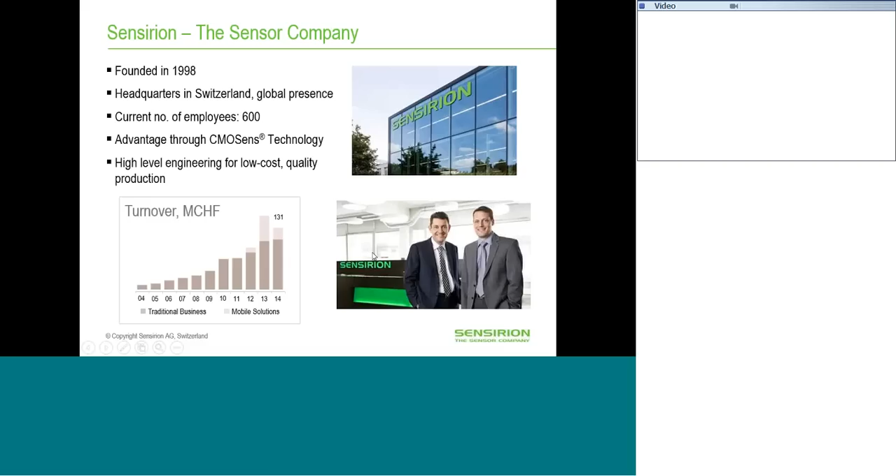And what you can see here is the latest turnover. So we are a medium-sized company with about 130, 140 million Swiss francs turnover, and on the right side you see the founders of the company, which are Moritz Lechner and Felix Mayer, and they're still co-CEOs, and the company is still privately owned. So we have a very long-term perspective on what we want to do research-wise and product-wise, and that's actually a quite good working environment too.

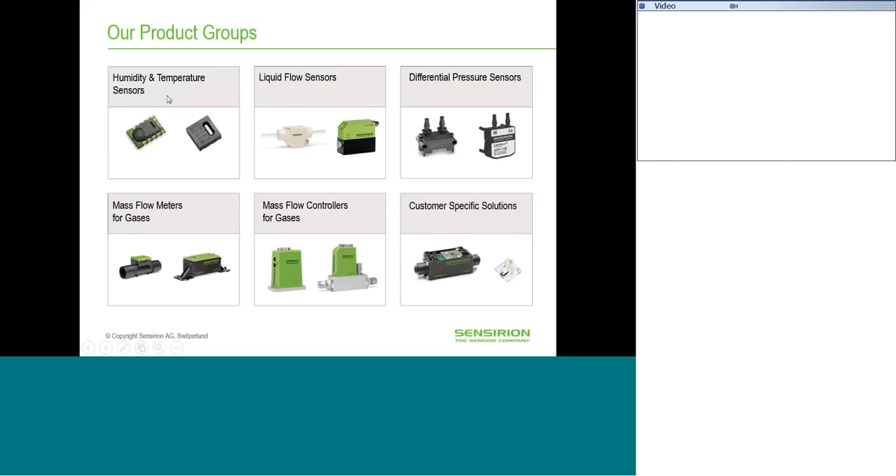Our product groups are not only humidity and temperature sensors, which the talk will be about, but also flow sensors, differential pressure sensors, flow sensors for the gas and the liquid state, and customer-specific solutions and so on. So there's quite a matrix of different products which we are developing and working on. So I will focus now on the humidity sensors, which intrinsically also have a temperature sensor too.

And the next generation, the SHT3X, which we have launched already this year, is a very versatile sensor, which I address in the following slides, what the versatility of the sensor actually means. But now let's just quickly go into the topic of discussing the physics of humidity.

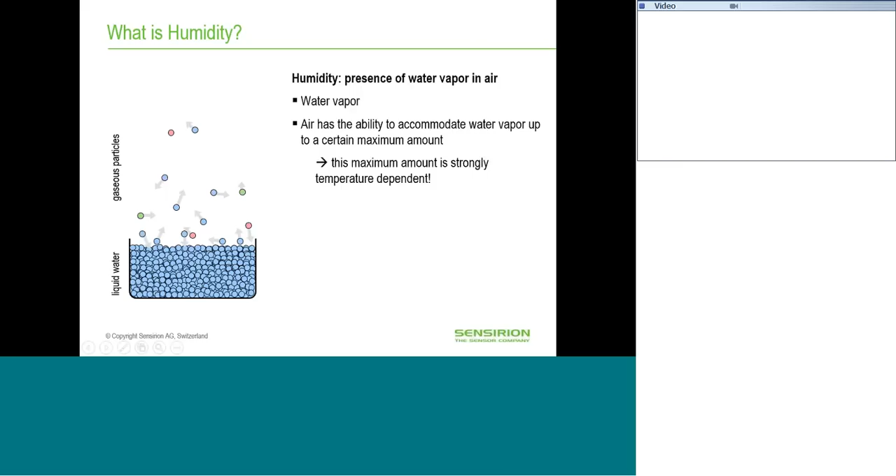So if you have a closed box now, a closed environment, we will have an equilibrium state where the evaporation rate from the liquid phase into the gas phase will be equal to the condensation rate from the gas phase to the liquid state. And in this state, the air is saturated with water vapor, and this is the maximum amount of water vapor the air can accommodate. So what's happening if we increase the temperature?

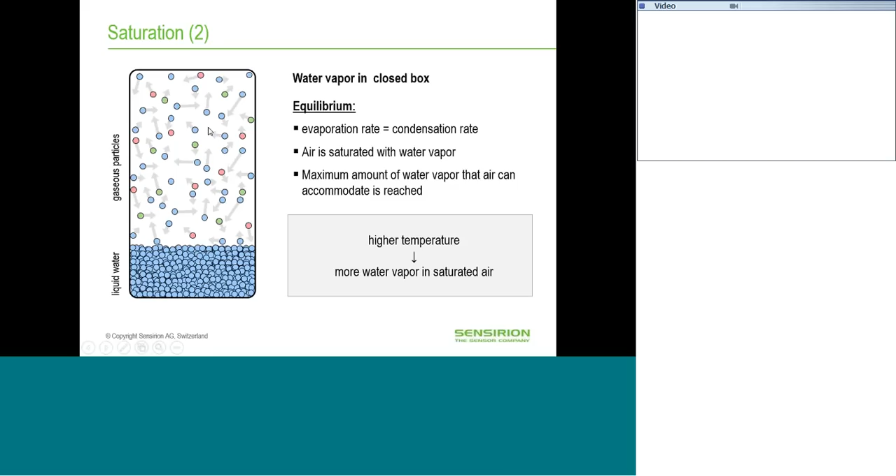If we increase the temperature, more water is released from the liquid state into the gas state, and the air also can accommodate more gaseous water. So there's more water vapor saturated in the air. This is following an exponential law. So the saturation vapor pressure of gaseous water is an exponential law with respect to temperature.

And like I already mentioned, we have an equilibrium state once the evaporation rate and the condensation rate are equal. And again, we see that this exponential law will be a phase limit line between the gaseous state and the liquid state.

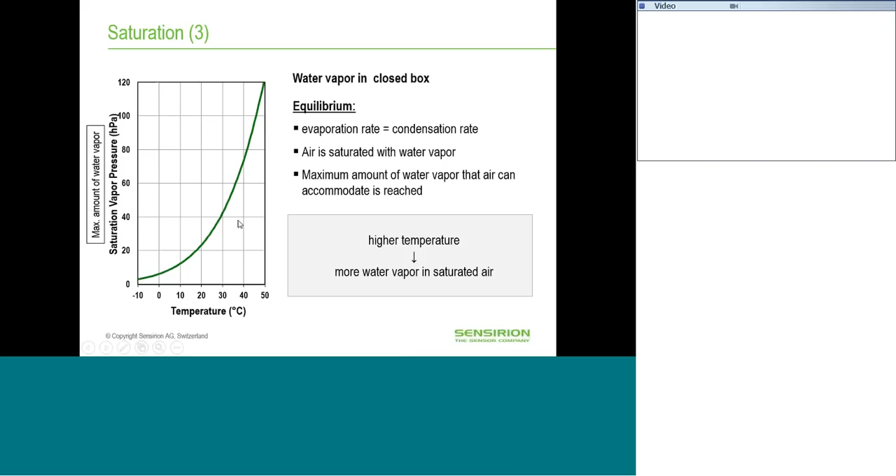So for example, if you have a temperature of 30 degrees Celsius and we have a relative humidity of 50%, this is actually the amount of water vapor in the air divided by the maximum possible water vapor in the air. So if you double the amount of water vapor in the air, then you will reach this line, and then you will cross from the gaseous state to the liquid state.

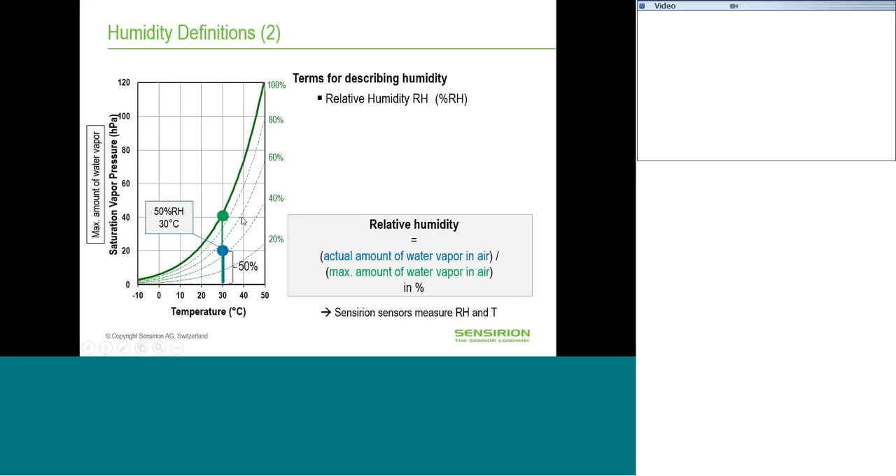And so you will have different exponential lines for certain values of relative humidity, and so you already can see that it's very important, if you talk about relative humidity, at which temperature you are sitting. So for example, if you're sitting at 40 degrees Celsius, your relative humidity of 50% means that you can have a lot more water vapor in the air.

There's a different description of relative humidity. That's the dew point, which is basically a temperature value which is derived from your certain relative humidity value, if you're going horizontally towards the phase transition line, which is the green line that I already introduced. And once you're hitting that line, that means you would be crossing the transition from the gas state to the liquid state. And this is the dew point.

So if you have a certain humidity at a temperature of 30 degrees Celsius, for example, the dew point would in this case be 18 degrees Celsius. And if you shock cool the room or the environment down to 18 degrees Celsius, your water vapor will start to condense.

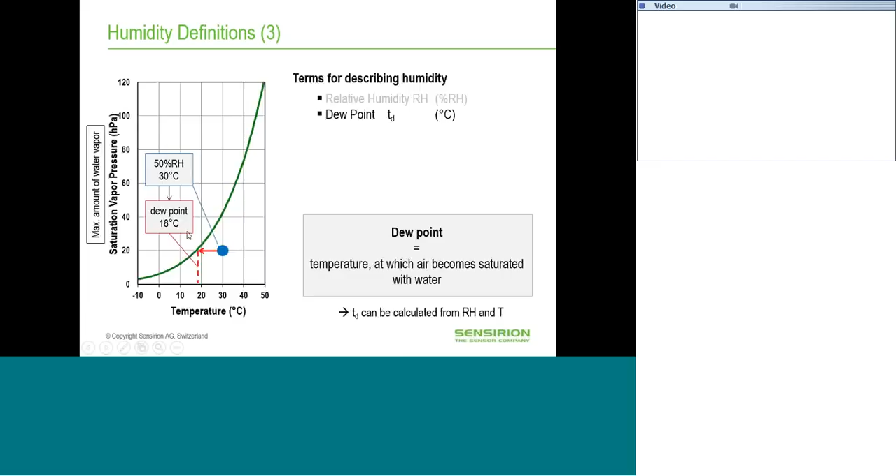So the main topic I wanted to share with you here is that humidity is relevant to our everyday life. We are always exposed to humid air. You experience that in heated rooms in winter when there's lots of heating power, and the dry, cool air will be heated up, and you will have breathing issues if the air is too dry.

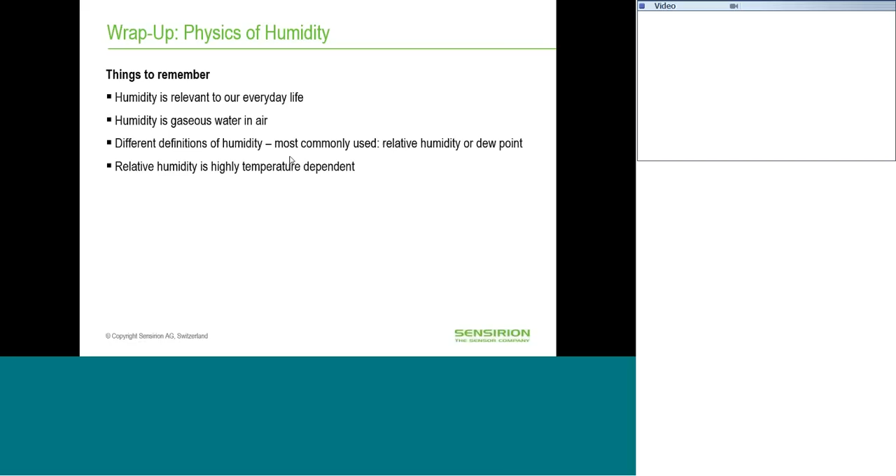So it's a very important factor for our well-being, and humidity is basically the gas phase of water in air. And we have different definitions, which are the relative humidity or the dew point, to describe a certain humidity state. And once again, it's very important to have the temperature if you're talking about relative humidity, and this is why every RH sensor, relative humidity sensor, also intrinsically has a temperature sensor. So this is basically a short introduction into the relative humidity topic.

Miriam, are there any questions so far? So far we don't have any questions, so we can continue. Okay, thank you very much. Thank you.

Let's talk about what we are doing to detect humidity at Sensirion. We have quite a large variety of products, and they are all based on the patented technology which we call CMOSens. Here at the bottom you see our latest DFN package-sized SHT3x humidity sensor, and if you look closer, you see a hole in the middle, directly opening the package to the die, and the silicon die is covered with some electronic structures, which you see here in the form of a grid structure, and on top of it there's a polymer.

It's a water accepting polymer, so if there's a high humidity, or a large number of H2O molecules in the air, then these water molecules will penetrate into the polymer and change its capacitance. So what we are actually doing is measuring the capacitance of this capacitor, which consists of this grid structure and the polymer, and we do this with a frequency measurement, and you can measure it very, very accurately.

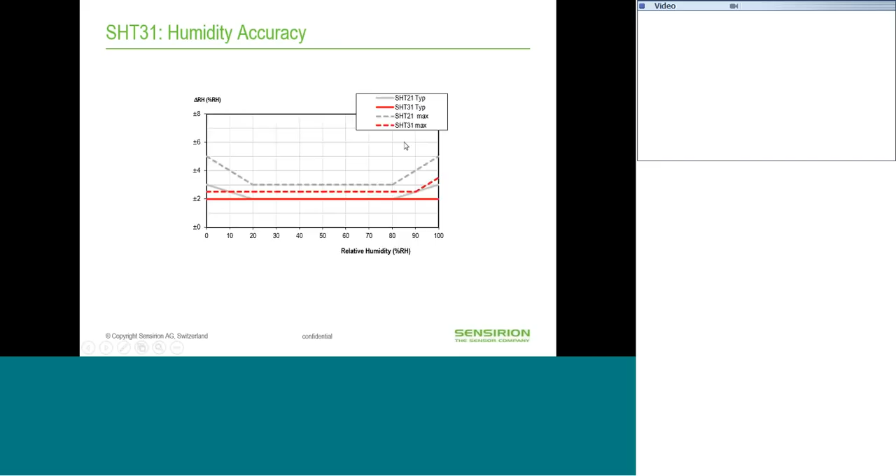this accuracy level, and also the maximum values are almost flat, and we could significantly reduce the maximum accuracy of the delta RH. Maximum accuracy means a deviation of four sigma of a set of sensors. But there's also a little more detail, because we have a two-dimensional phase space, if you wish. We have temperature and we have relative humidity.

And if you look at the whole two-dimensional accuracy map, you will see that there are quite some edges and side points where the sensor is not as homogeneous as you wish it to be. And here, this is the previous sensor. I should have explicitly labeled it. It's the previous sensor, the SHT21, and the SHT31 now really changed this whole accuracy map into ±2%.

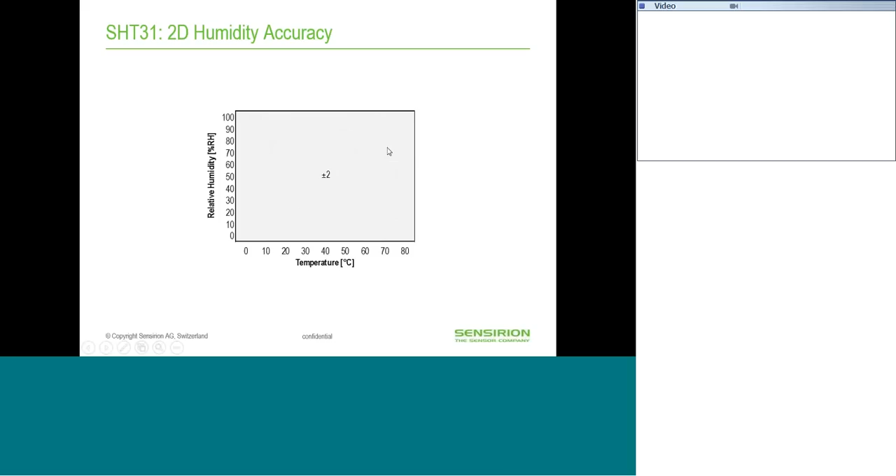So you, as an application engineer, don't really need to worry about what your temperature and relative humidity are and look up how accurate your measurement is. Actually, everywhere it's ±2%.

Okay, so let me briefly discuss the analog outputs. We have a ratiometric voltage output of 10 to 90% of the supply voltage. It's a fully calibrated signal. What we do is we convert the analog signal into a digital one, linearize it, and do the analog conversion back. And this is our output.

So this is the ratiometric output, ranging from 0 to 100% humidity. And you can read out the temperature and the RH value on two different pins here. Pin 1 is for the RH, and pin 4 is for the temperature.

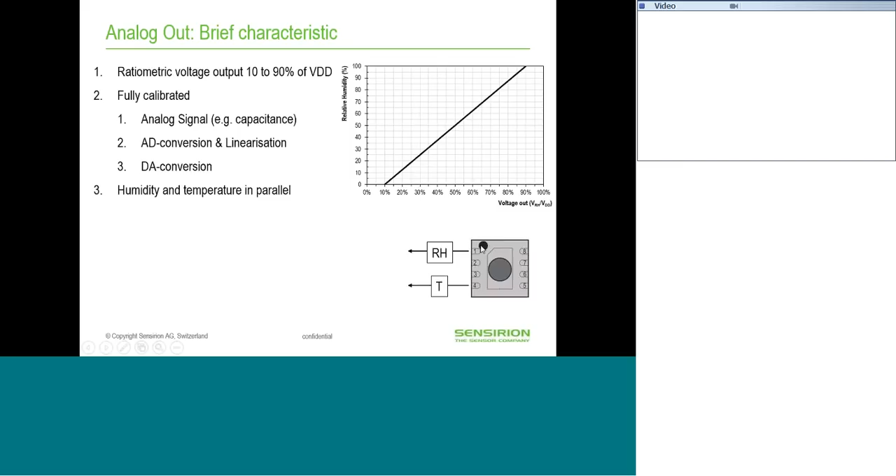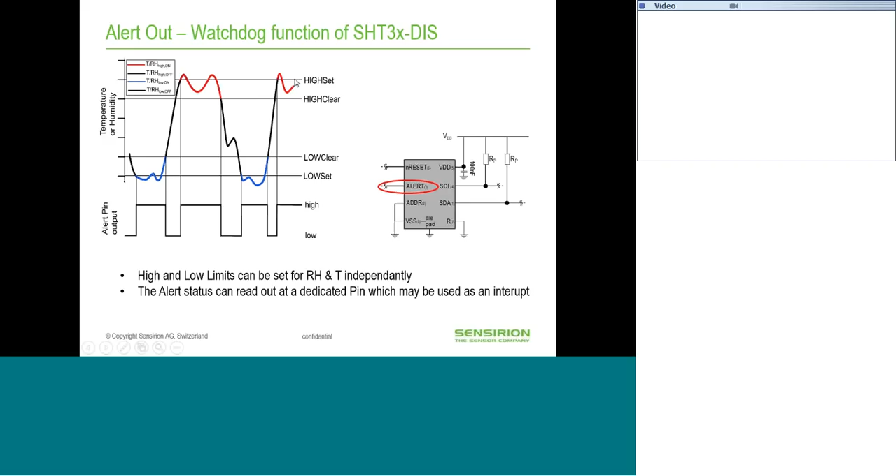A second feature which we have now implemented on the sensor is an alert value that you can set independently for the RH and the temperature values. So as soon as, for example, the temperature or the humidity rises above a high set value, the sensor will communicate the new RH value, and unless this happens, the sensor will just not communicate, and in this case save on power. And you can set different high set and clear values, and also low clear and low set values.

And what I would also like to quickly introduce to you now: the sensor is basically this small 2.5 millimeter square package, and it's very hard to get a grip on it once you just have the sensor lying around.

And Miriam will probably mention this later also: we will provide a small Bluetooth gadget, which has the current sensor implemented, and it comes with a battery you see here, a Bluetooth module and a display, and it's quite a handy small temperature and RH weather station, if you wish. A weather station would mean you have a pressure sensor, but this is not the case. So I will just call it an advanced thermometer.

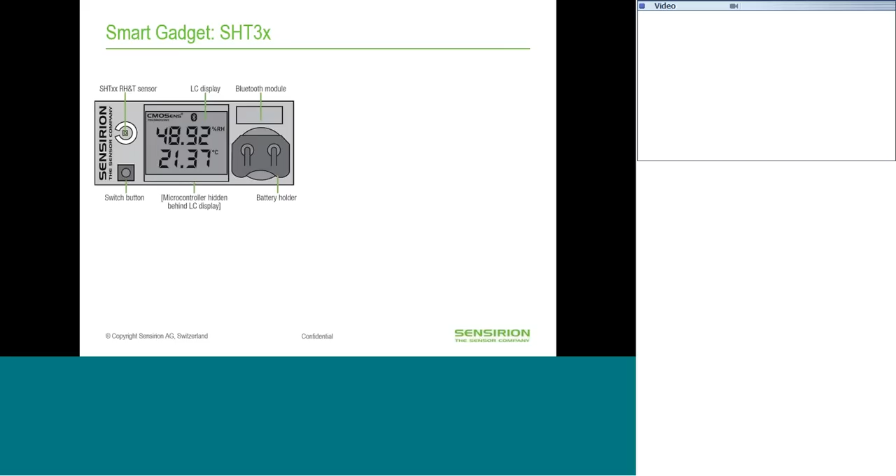And the nice feature about it is that you can download an app in the App Store or in the Play Store for Android smartphones, and communicate with the gadget via Bluetooth, and this will allow you to log your temperature and humidity values over time, and this will also give you a first grip on the sensor itself.

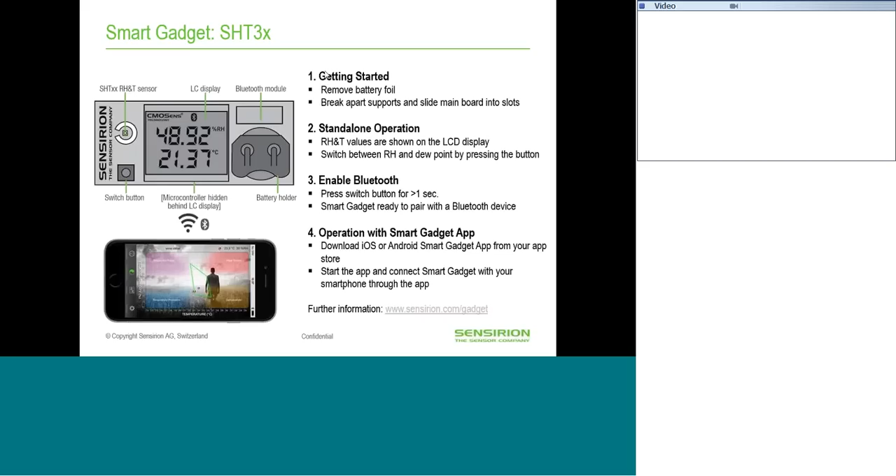So you have smartphone connectivity, and there's an app which you can download for free in your relevant store, and you can just get started by removing the protective cover for the battery, and then it's pretty much self-explanatory, but we will also have a data sheet coming with the gadget. So feel free to use it, and please enjoy the app.

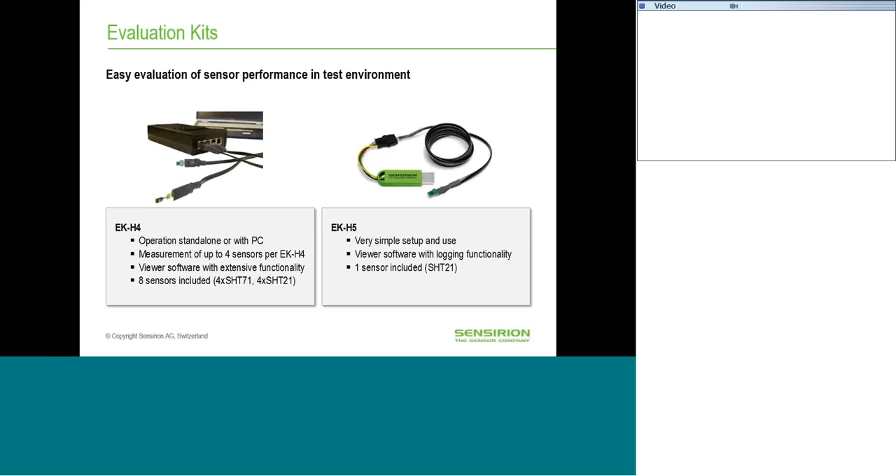So this is a very simple plug-and-play solution for your computer. You can use it with a USB adapter, and at the end of the cable you have different options to mount different sensors. So it comes with several sensors, and I will quickly show you once you've downloaded the software. There's also an explanation of where you can find the software. It's also on our web page. It's quite a straightforward installation. Let me quickly show you.

I've already installed the software, and if I start it here, it will prompt and ask which sensor I'm using. In this case, I put in the sensor SHT2x, and then I will just click OK. And you can start, run and play with different resolutions and stuff like that. And here you will see the temperature and the humidity.

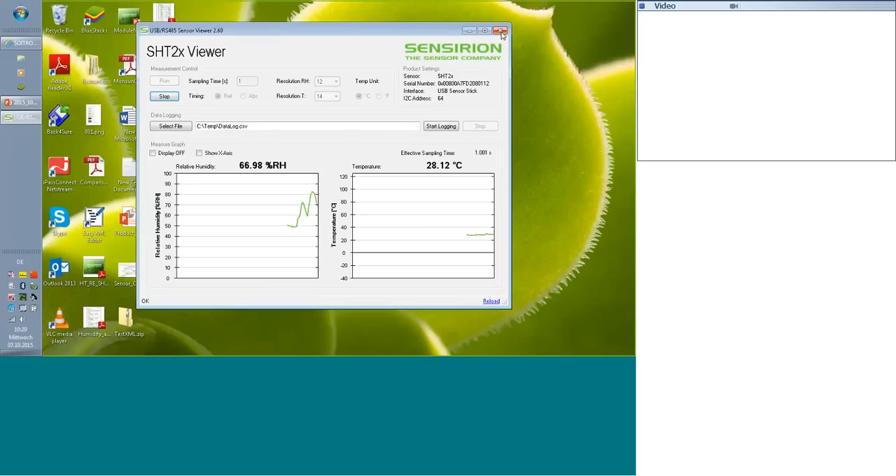And what I'm doing now is basically breathing onto the sensor, and you will immediately see that the humidity will rise and the temperature will rise, and it's quite a quick way to get a first grip on our sensors and play with them in relevant and different scenarios. So coming back to the presentation, this was the live demo. And like I said, it's a very nice tool.

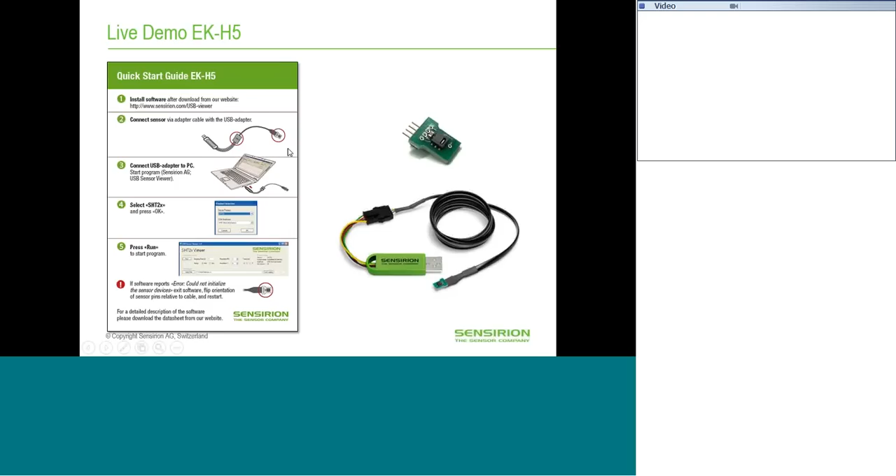If you have sort of an engineering prototype standing around, you can easily plug this into your fridge or whatever you're developing and get a first-hand experience on it. So far for the technical part on these SHT3x sensors, please feel free to ask any question you want.

So far we don't have any questions, so we can continue.

Excellent. So now I will briefly talk about design guidance and handling instructions. As you might expect, the humidity sensor is always just as good as it's sensing its immediate surroundings. So it's very important to provide for a proper design of the sensor, and it should be best coupled to the environment and not really to the electronics of your device.

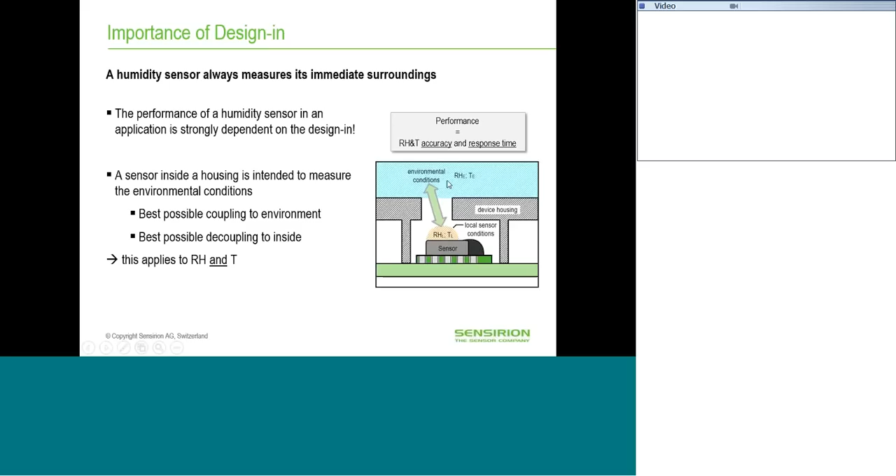So if you're building, for example, a smartphone, you will have several electronic devices in there, and it will heat up, and you don't really want to measure basically the temperature of your processor. So it's always important to have a good coupling to the outside or to the actual environment you want to measure, and to have a very strong decoupling to the inside, which is basically just the readout electronics or the processing power.

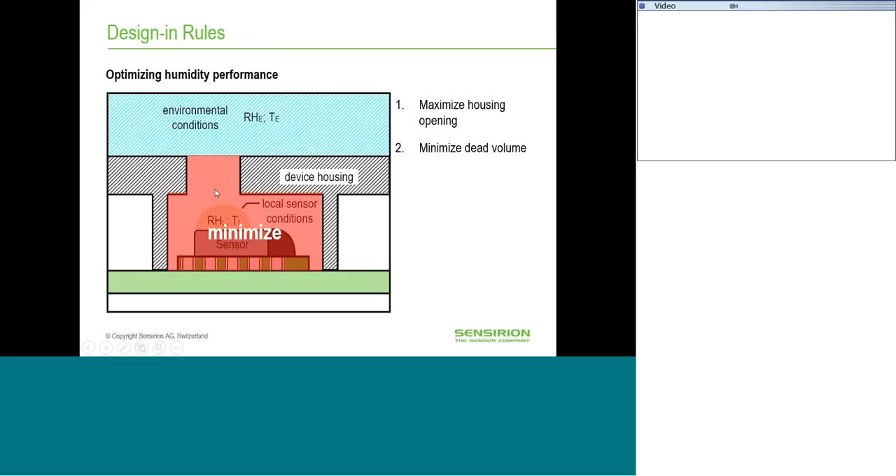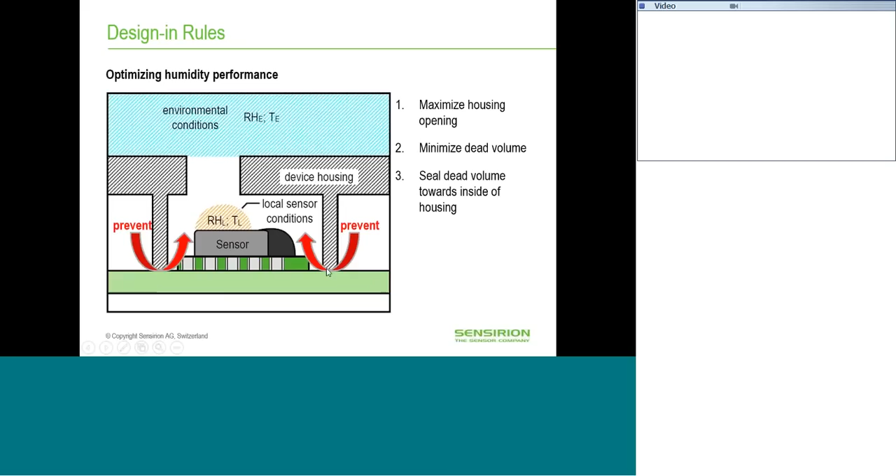In this case, you really want to maximize the opening of the housing, and you also want to keep this volume very minimal, so you're not having a huge response time before this outer environment will be completely in equilibrium with the inner, or vice versa. And you also want to prevent a lot of crosstalk from the housing to the actual sensing environment. So this basically needs to be sealed very well against humidity, for example.

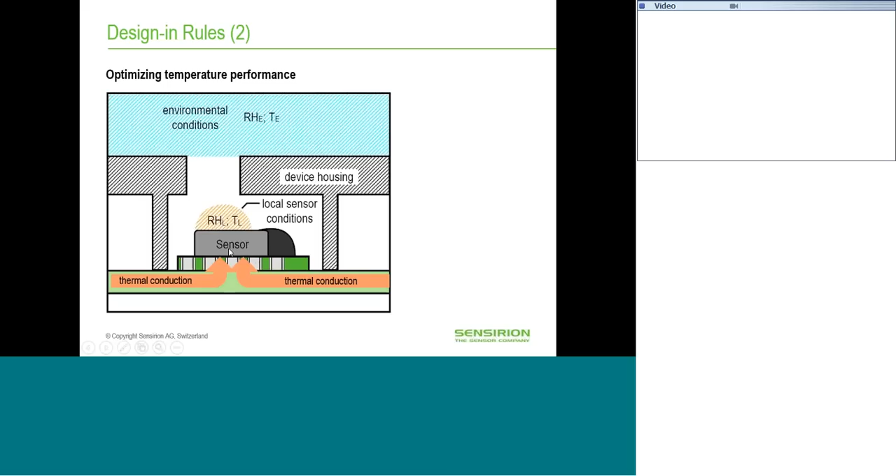And the temperature performance also benefits if there is not a huge thermal conduction. So if you mount this on a metallic substrate, it's very critical to reduce the thermal conductivity towards the sensor. We have SMD assembly processing guidelines, which are hosted on our website. The sensor itself is reflow solderable and can go through several reflow soldering processes.

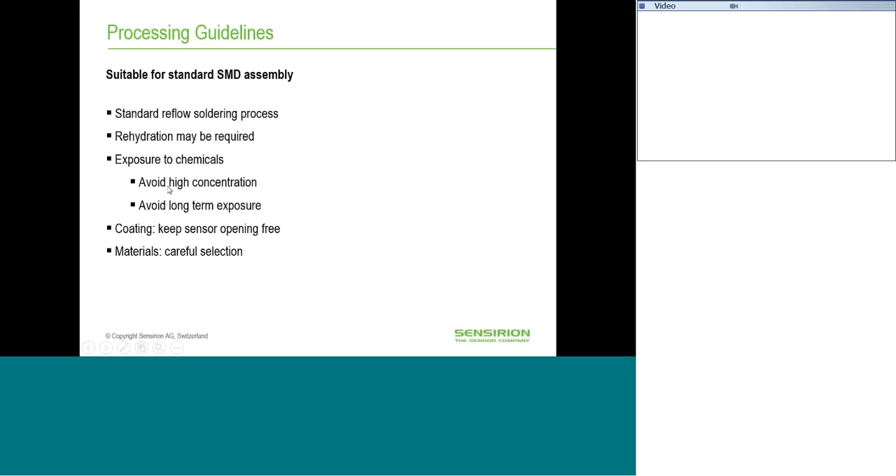There might be the task to rehydrate the sensor, because if you heat it up for too long, the humidity gel or the polymer will dehydrate, and this needs rehydration. We also want to avoid high exposure to chemicals, and there are different chemicals which are contaminating the sensor. We have a list on our website where you need to take care that there's no high concentration chemicals going to the sensor directly. So I just put this as a link or a reminder. We have handling instructions on our web page, and there's more details to find there.

So finally, what's really important to do or to not do with the sensor? It's really important to take some effort to make a proper design-in of the sensor, because otherwise the sensor can have a very fast response time and can provide very quick accurate measurement values, but if it's not really talking to the environment, then this is not really useful to you as a customer.

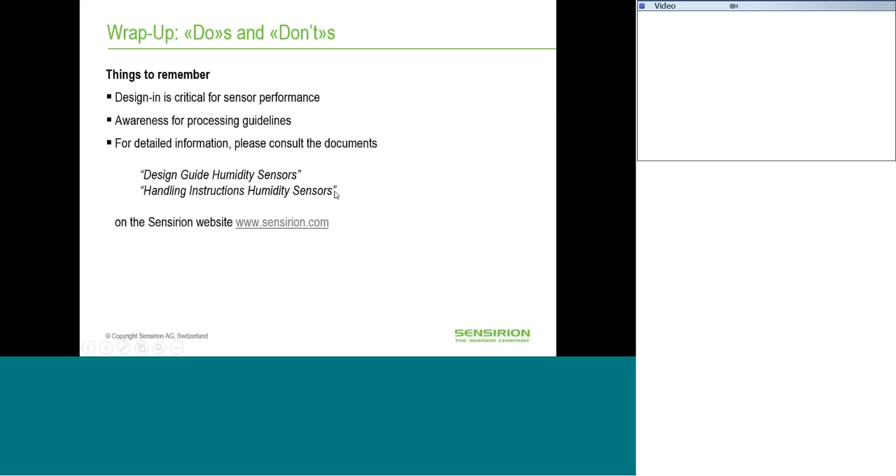So the design-in is very critical, and we need to put a certain awareness to the processing guidelines so that we are not contaminating our sensor. And like I've already said, we have several handling instructions and documents on our website to discuss this topic in more detail.

So finally, I would like to talk about a few application examples where we've already used the sensor successfully with customers, and they're getting really good value for what they're measuring there. So one not-so-daily example is building monitoring. An Austrian company developed such a box with two humidity sensors which are deployed once the raw structure of your house is built.

Then you want to put in your carpet or your wooden floor, and it's very critical to wait the right amount of time to have the concrete dried out enough, because otherwise you will still have high humidity in the concrete, and once you put the wooden floor or the carpet on it, you experience huge damage there.

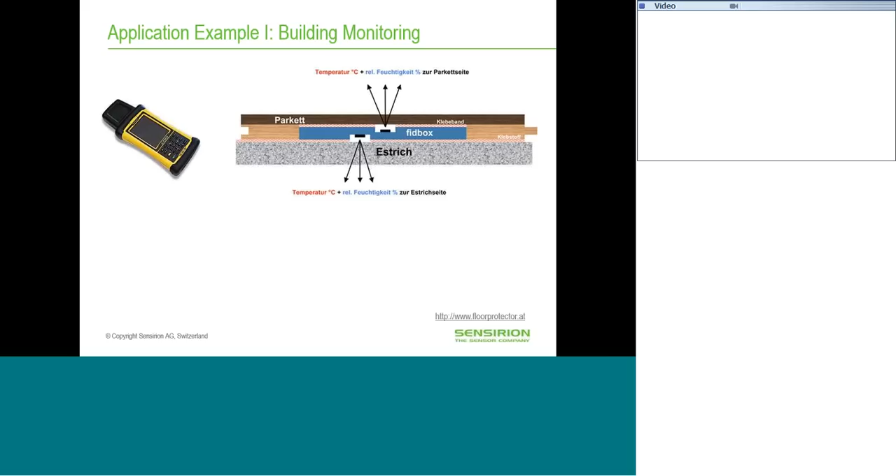So what these guys are doing, they put the box there and log the temperature and the humidity, and can accurately determine the humidity value before they start putting on the wooden floor, and they can also monitor it afterwards for a certain amount of time to better deal with customer complaints. There might be the case that the customer is just cleaning the wooden floor with like 10 liters of water, and then there's damage coming up.

So if it's a freshly built house and the customer is not mentioning this, then the house builder would be held liable for this incident, because they will complain that the concrete was not dry and they put in the floor too soon.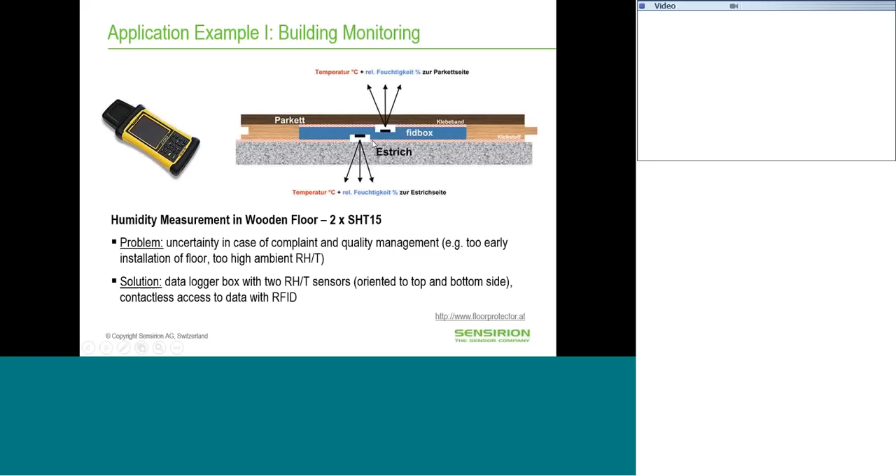So this is an excellent solution to actually provide a good building history, and to also make it trackable for the user, for example, for the house owner, so that everything's going right. And another example is the Nest company, which was just recently purchased by Google for, I think, over $3 billion. They are building smart home devices.

That means they have a smart thermostat which you can control with your smartphone via an app, and this will allow you to make a smart home control. And we have put our design-in expertise and our sensor know-how into this thermostat, and this way this is a very interesting application to promote your home to a safer or, in the first case, to a more energy efficient way.

And in the second case, Nest is also now producing fire alarms or smoke detectors, and there's also a certain need for humidity sensing there, because you don't really want to detect with your fire alarm that you are now having a shower. And that was basically the main problem for many of those fire alarm manufacturers, that there will be a false alarm during showering or when you're boiling your noodles or cooking rice or whatever.

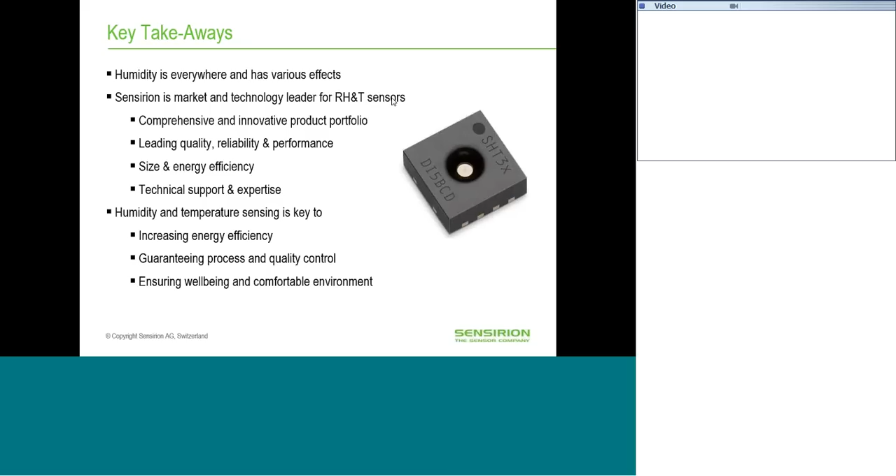For example, if you're shipping foods or fresh vegetables. And humidity and temperature are very vital values if you want to have a comfortable environment in your office, in your car, or at home. So far this is what I wanted to share with you.